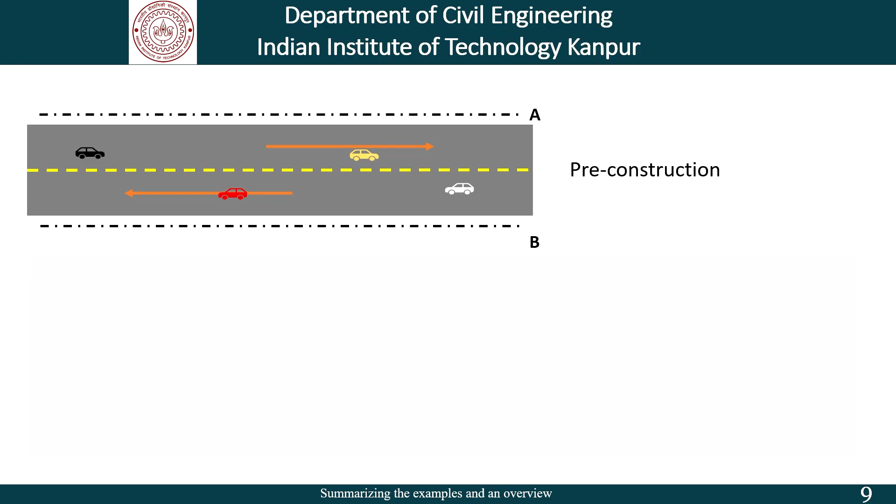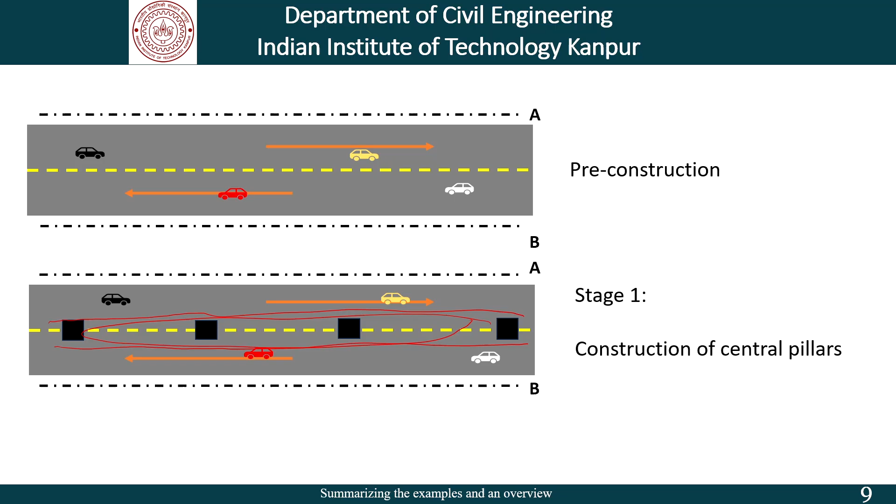As a first step or stage 1 in the construction of the elevated metro or the highway, we have the construction of these central pillars. Now, at the time of construction of these central pillars, very often we barricade this part, so that the construction activities are confined to this region and the vehicular traffic does not come in this part. Then comes the stage 2, where these cantilever portions are added to the central pillars.

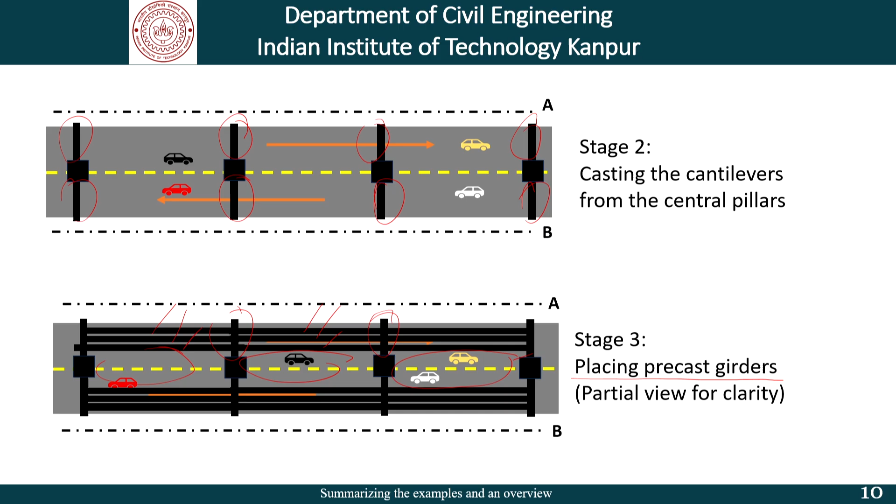Following that, we have the placing of precast girders, that is, these precast girders are placed on these pillars. Of course, I have not shown the girders in this part and this part and this part, so that I can still show you that the vehicular movement as far as this road is concerned still continues. Now, whether it should continue, should not continue, should be halted, diverted and so on, that remains a matter of discussion. Now, with this kind of a situation, there is a mishap that can easily happen.

The traffic on the road was not stopped during the erection of the girders, and one of the girders falls during erection and crushes several cars plying below. So, what happens is that these girders, while they are being placed using cranes and so on, are in a very vulnerable position. So, one has to be very accurate, one has to be very thorough in planning how the girder is going to be lifted from the ground, maneuvered into position and lowered into position. There is a possibility, and that is what happened as far as this example is concerned, that that girder falls below and crushes some of the vehicles which are plying below.

Common sense would dictate that traffic on the road should be stopped or diverted at least during the erection of the girders.

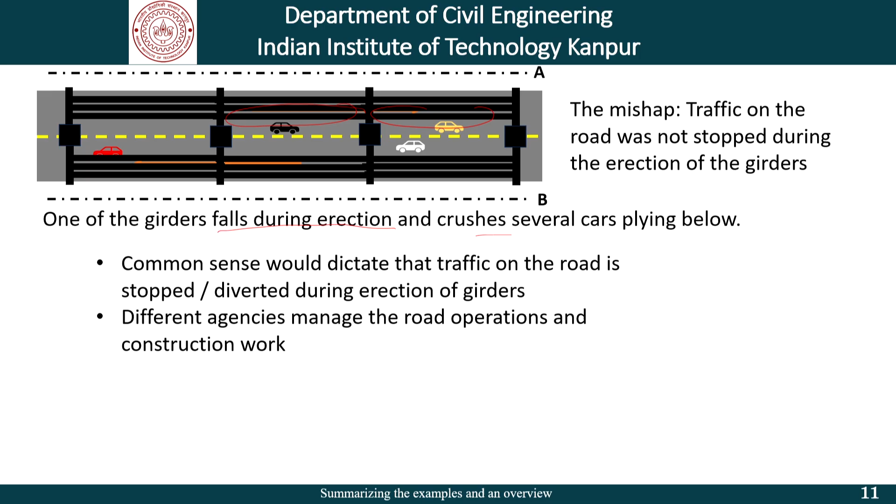Why it did not happen, or it is difficult to implement that, is simply because there are different agencies that manage the road operations and the construction work. So, the construction work is handled by a contractor who is charged with the responsibility of creating or having a safe environment for all the construction processes.

Whereas the road management is generally governed by some kind of a municipal corporation or a municipal authority or a regulatory body, which is not within the control of the contractor. Very often the contractor does not even report to the municipal authorities, except that as far as the construction activities are concerned, there is a system by which the municipal authorities and the local bodies are aware of the construction work, they permit the construction work and are directly or indirectly responsible for all that goes on at the construction site.

So, if this accident happens, this mishap happens, then of course, these people cannot say that we were not aware of the fact that the traffic had not been stopped. It is very likely that the contractor approaches the municipal authorities, please stop the traffic because it is an unsafe condition for erection of girders, and more than the erection of girders, it is the passers-by who are at risk.

At times, it is difficult for the road operator to simply stop the road, because in their opinion, it would cause inconvenience to the local people and so on. Moving forward, this at the end of it is the recipe for a major mishap.

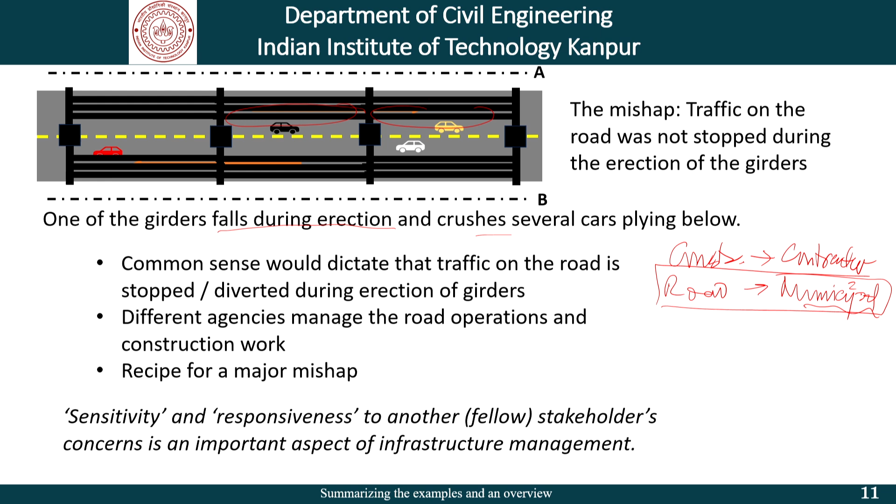Moving forward, let us take another example, and that is consider a fire incident in a public place like a hotel or a mall. We often hear of a situation that there was a fire in a mall or a hotel or a club with a lot of people suffering injuries. Investigation often shows that the cause could be an electrical short circuit, which experts later attribute to an indiscriminate increase in loads on the wiring system designed for a lower load level. Periodic physical inspection of electrical loads and wirings were neither mandated nor carried out by the regulators.

What is being pointed out here is that if it is a hotel or a mall or a club, very likely the property is privately owned. That is, primarily it is the responsibility of the owners to ensure that the conditions there are safe, and the wiring is such that it can take all the loads. But over a period of time, it is always possible that more air conditioners are included, the load on the system increases without making appropriate changes in the wiring, which leads to an accident at some point in time.

Now, in order that that does not happen, the regulators give permission to operate a certain facility, keeping the public interest in mind. So, the interests of the people who are using the hotel or the mall or the club are primarily supposed to be looked after by the owners of the facility, and the regulator is finally responsible to ensure that the users' well-being is taken care of. This can be done through periodic physical inspections, which in this case, as the example suggests, is not mandated and therefore not carried out by the regulators.

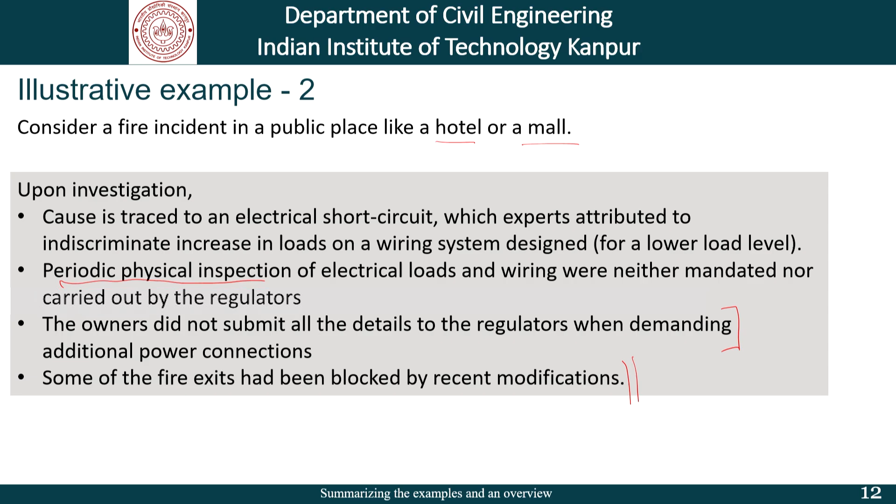It is not only the physical examination periodically by the electrical department, but also by the firefighting department, which needs to be highlighted and taken into account when we are talking of fire safety in these kind of public places.

Now, let us go on to the third example for the day, which is considering an old bridge made of concrete in a children's park, which over time deteriorated with cracks which were clearly visible. The owners closed the access to the bridge and asked an agency to repair it. The agency filled all the cracks and repainted the bridge. Within a short time of opening the renovated bridge, the bridge gave way.

Now, if these were the facts or imaginary facts, after all it is an illustrative example, there is an investigation. The investigation reveals that the reinforcement inside the concrete was badly corroded. The surface cracking which the owners saw, because of which they closed the access to the bridge, was only a manifestation of that and not the real issue.

Therefore, it is clear that the owners and the repair agency did not understand the seriousness of the issue at hand. In fact, the agency was not given an appropriate scope and mandate, if the mandate is simply repair. Now, the issue is what constitutes repair. As far as this example is concerned, the way I have written it, it says the agency filled all the cracks and repainted the bridge.

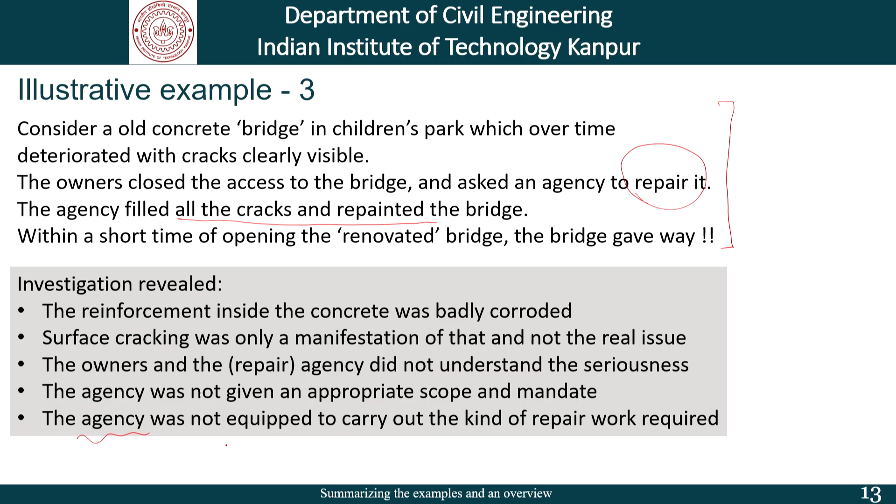Before we go to the agency that was not equipped to carry out the kind of work that was required, we have to identify what kind of repair work was really needed. So, the scope of work had to be probably better defined, and that is where the owners come in. The owners did not understand the seriousness of the problem, and there was a technical issue involved, that is the reinforcement in the concrete had corroded.

So, the cracking was not the real issue; it was the corrosion, and therefore, as far as rehabilitation is concerned, the issue would have been that okay, you remove the concrete, find out how much corrosion has happened, provide additional reinforcement, do the concrete work, and then do the painting and so on. But that was neither defined nor a part of the work that was given to the agency.

So, this example actually brings out the importance of having the right kind of contracts, right kind of scope, and obviously all this is related to the kind of resources that are required. This will also go to the fact that okay, how do you identify the agency for carrying out such works?

An agency which is good to just fill the cracks and repaint may or may not be the best agency to carry out the kind of repair work that we just talked about, removing the concrete, providing additional reinforcement, closing with more concrete and so on. Whether any structural engineering kind of discussion or intervention is required is another story here.

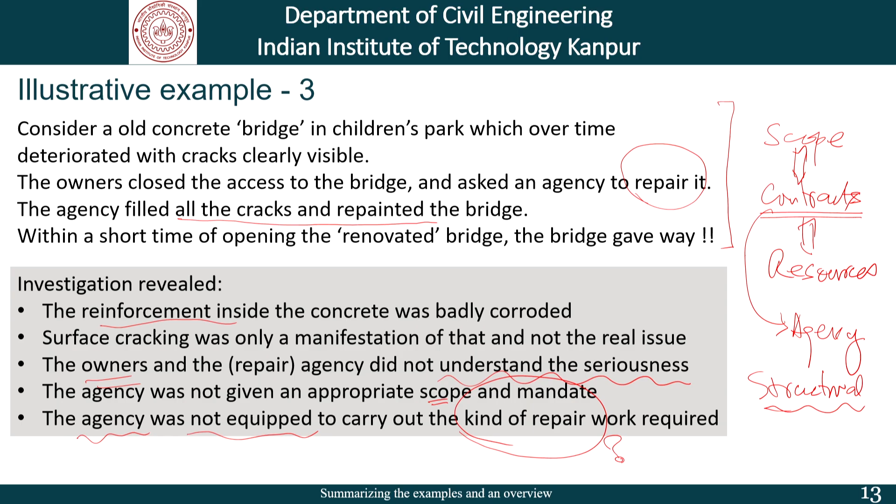What this example also brings out is that at times the owner's ignorance also becomes or could become an important issue as far as infrastructure management is concerned.

The last example for the day is a situation where we have an old bridge, something like this, in a place, which is replaced by this bridge at some point in time, and then by another bridge, which is this bridge at a later point in time. These two bridges are still in service and this bridge has now been abandoned.

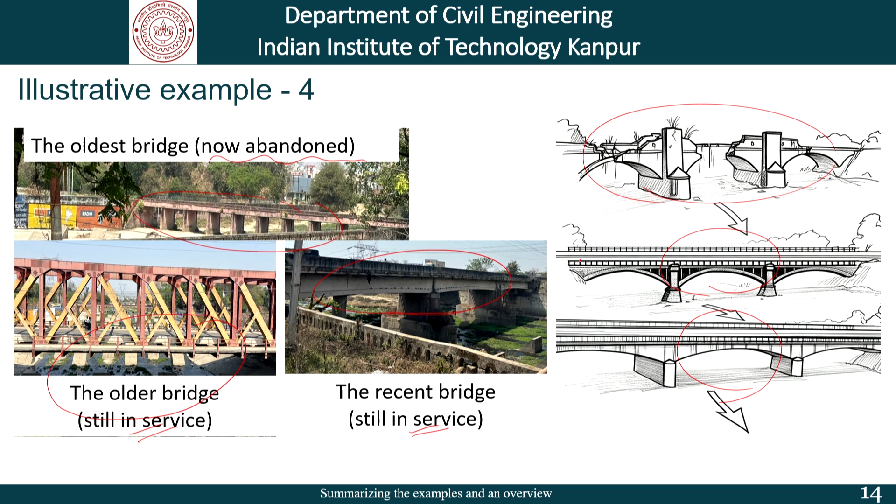So, if we have a situation like this, which is kind of illustrated here, that we have an old bridge which is in a dilapidated condition, which was replaced by this bridge, and then finally another bridge came in here, and now all these three bridges are parallel to one another and fairly close by.

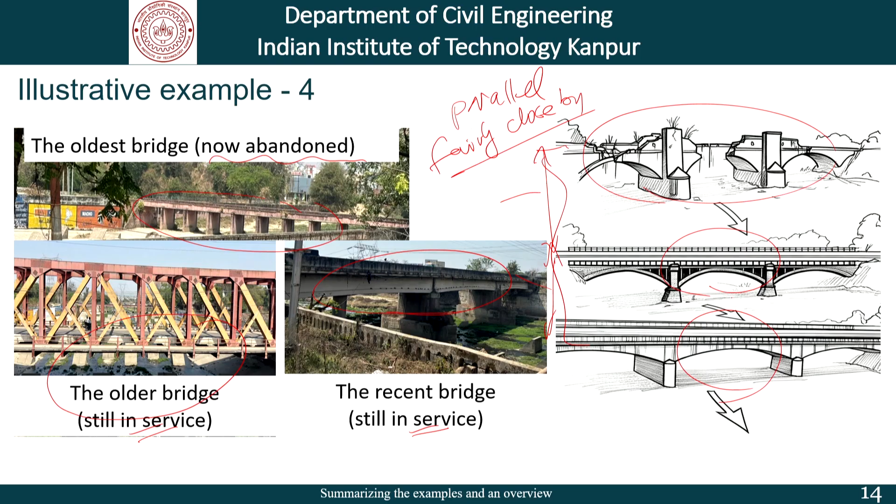Now, fairly close by means that the distance between this bridge and this bridge, and this bridge, is not very large. Now, the abandoned bridge is not monitored at all, and after a few years in a flood, one of the piers of this bridge is washed downstream and hits a pier of the newer operational bridge, causing serious damage to it. So, the description is that this bridge, which is the oldest and abandoned, was not being monitored at all, and in a flash flood one of these piers gives way and comes and hits this bridge.

So, we are having a situation where we have these three bridges. This is the downstream side. So, this bridge was abandoned, a pier from here comes and hits a pier from this bridge, and this bridge gets damaged. Now, this is something which is completely unforeseen as far as the scenario is concerned.

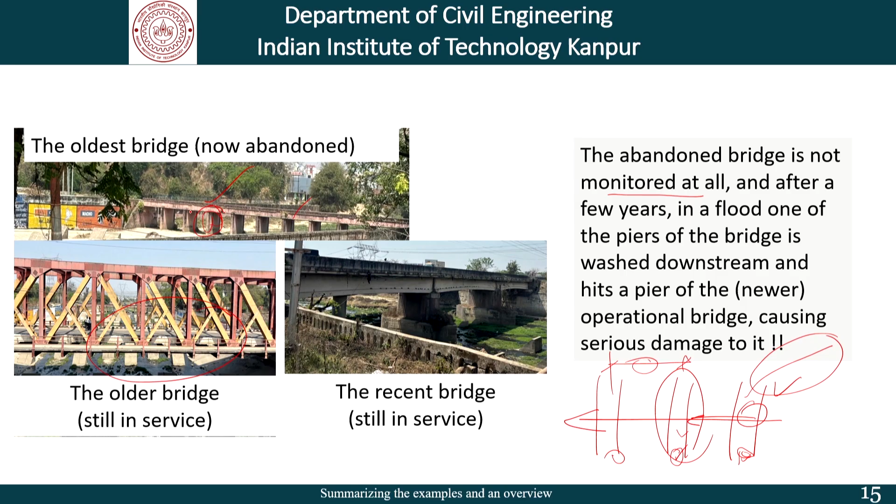We must remember that when planning, a planner would be tempted to reduce this distance because the approach roads which were there for this bridge would need to be modified a lot more if this bridge or this bridge, whenever they were made, were far away from this bridge. The closer the new construction is to the old one, the smaller will be the amount of modification which is required from the approach roads point of view. So, with that consideration, we might like to keep these bridges closer. But what happened here was that because this bridge was not being monitored at all, what was happening to these piers was not known and the unfortunate accident happens.

So, now what are the learnings? One thing is that the structures should not be simply abandoned. There should be a plan for decommissioning. We have to understand that unless we decommission the structures, the old structures which are not in use will just keep occupying space and will become an eyesore as far as the landscape is concerned.

Just imagine how a city would look 100 years from now or 200 years from now if the buildings there were not demolished and rebuilt. If we just keep adding buildings to it and alongside we have buildings which are abandoned, that will be such a mess to see, and the people at that time would think, why have we left those buildings abandoned for somebody else to just not be able to do anything about it. So, there has to be a plan for decommissioning and removing assets as they outgrow their service life.

Even in the period of non-use, they should be watched. Of course, we need not have a periodic inspection and a detailed inspection and so on and so forth, but there has to be a different inspection regime for abandoned structures as well, so that any major distress and its possible implications can be watched out for. This is an important lesson from the life cycle perspective. We often talk in terms of the life cycle of infrastructure. Now, the life cycle of the infrastructure includes the decommissioning.